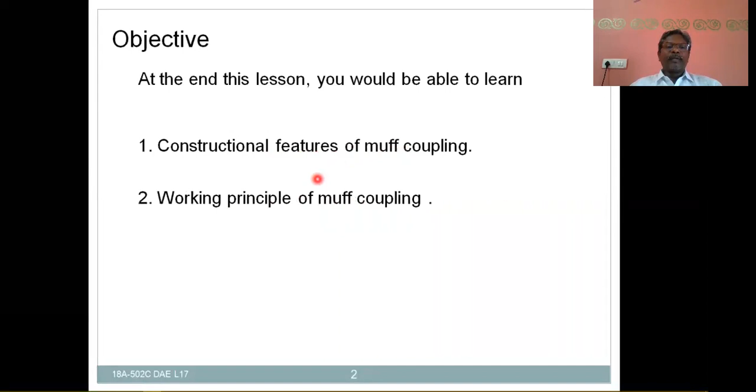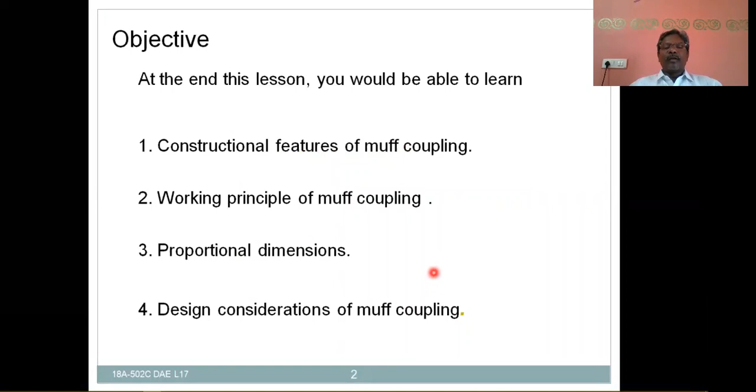So, muff coupling or sleeve coupling in this lesson. The objectives of this lesson are: at the end of this lesson, you will be able to learn the constructional features of muff coupling or sleeve coupling, the working principle of muff coupling, the proportional dimensions of muff coupling, and the design considerations of muff coupling. So, let us see one by one in this lesson. Muff coupling, also called sleeve coupling.

And this sleeve is inserted over the shaft, and another shaft is brought into the sleeve, and there should be half of the keyway in the sleeve or muff, and half of the keyway in the shaft, on both the shafts. And then after inserting this cast iron sleeve over the shaft, we insert the key into the keyway of the shaft as well as the sleeve. The key is generally made out of mild steel, that is, low carbon steel. In most cases, the shafts as well as the keys are made out of the same material, whereas the muff, that is the sleeve, is made out of cast iron. Drive this key into the keyway of the shaft as well as the muff.

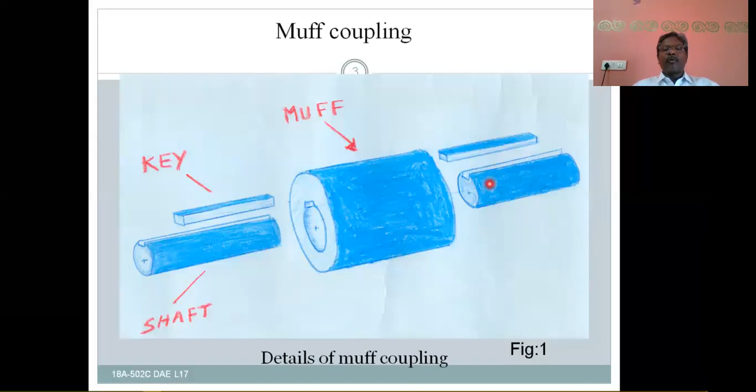Let D be the diameter of the shaft. D will be the diameter of the shaft, and the inside diameter of the muff or sleeve is also equal to the diameter of the shaft. So the inside diameter of the muff or sleeve is nothing but the diameter of the shaft, and the outside diameter of the muff or sleeve is 2 times the shaft diameter.

2 times the shaft diameter, whereas the length of the sleeve is 3 times the shaft diameter, right? So next is key proportions. Key proportions are as per the previous discussion, the standard proportions.

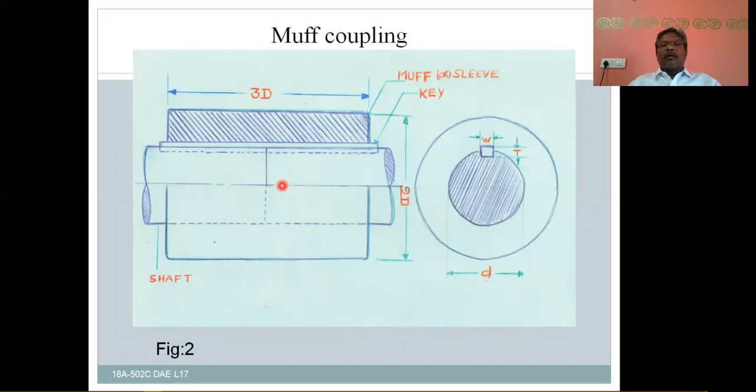Width of the key is 1 by 4th of the diameter of the shaft, and thickness of the key may be 1 by 6th of the diameter of the shaft. And next is the length of the key, generally equal to the length of the muff. And length of the key in each shaft may be half of the length of the muff, right? This is all about the assembly and the standard dimensions as per the proportions of the muff coupling or sleeve coupling.

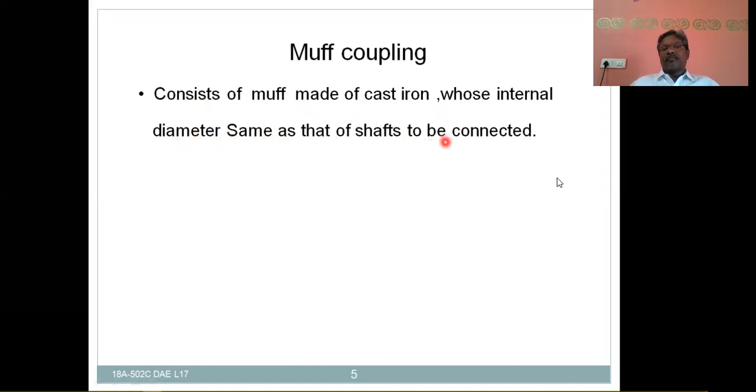Now let us see one by one. It consists of a muff made out of cast iron and whose internal diameter is same as that of the shafts to be connected. The muff internal diameter is same as the shaft diameter, and the muff is connected over the ends of the shafts by means of sunk key. The shafts are brought in line with each other, aligned and collinear, and over them the muff is connected to the ends by using sunk key.

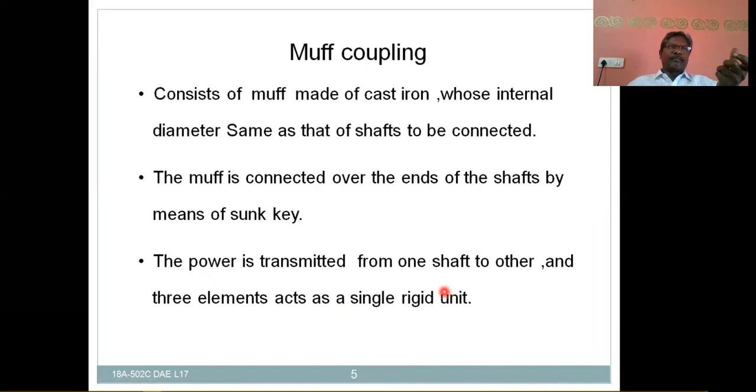And the power is transmitted from one shaft to the other shaft, and 3 elements act as a single unit. 3 elements, that means shaft, key, and muff. These 3 act as a single unit, right? So, and the proportions of cast iron sleeve or muff, let us see.

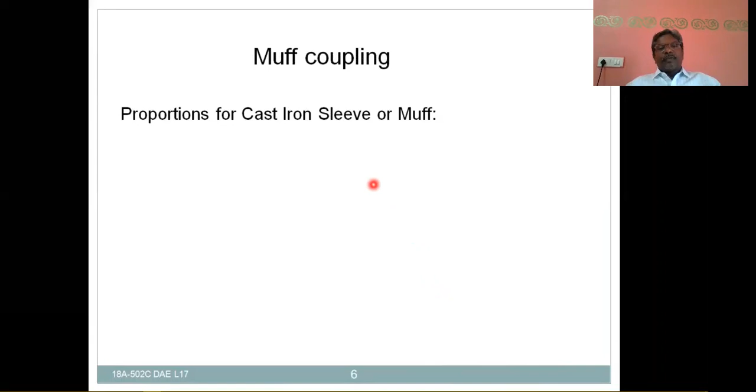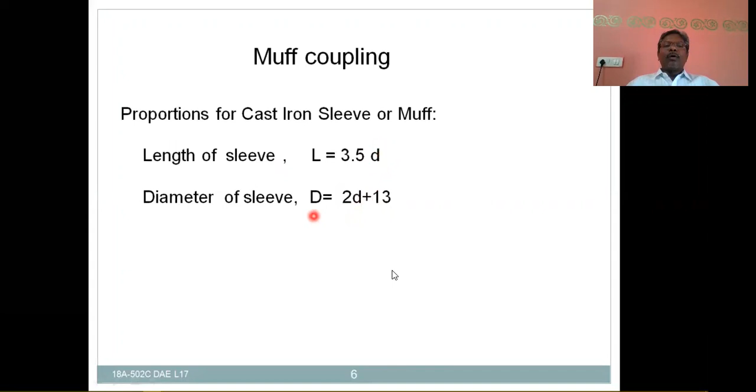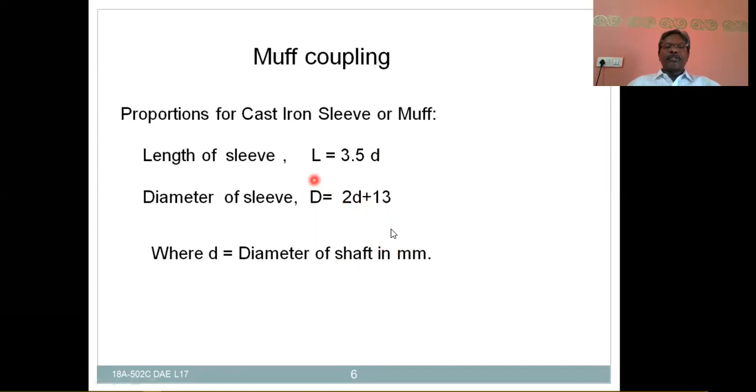So length of the sleeve, previously the figure itself is wrong, L is equal to 3.5D, length of the sleeve, and the diameter of the sleeve, also previously given in the figure itself is wrong, that is D is equal to 2d plus 13, where small d will be the diameter of the shaft. So outer diameter of the sleeve is 2d plus 13 and inner diameter of the sleeve is same as the diameter of the shaft. And where d is equal to diameter of the shaft in millimeters. Always it should be in millimeters. These are the proportions of cast iron muff or sleeve.

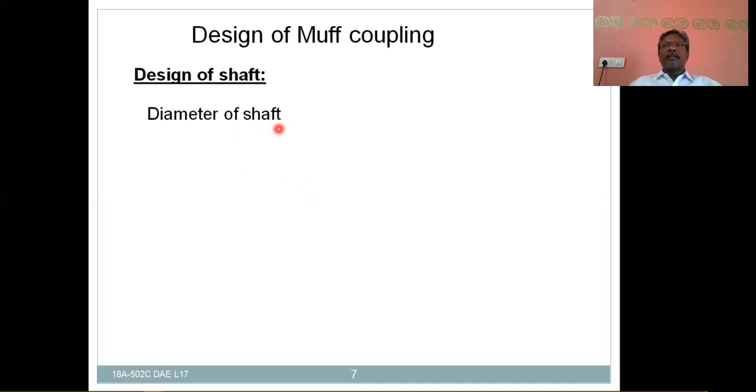Design of shafts. As per the design, diameter of the shaft can be calculated by using either the torque or from the power formula. That is, the torsional equation T by J equals tau by R. By using that, J is equal to pi by 32 d power 4. So R is equal to d by 2. After substitution, you are going to have torque acting on the shaft is equal to pi by 16 tau d cube, where d is the diameter of the shaft is equal to cubic root of 16 into T maximum by pi into tau. This is the equation that is useful for calculation of shaft diameter.

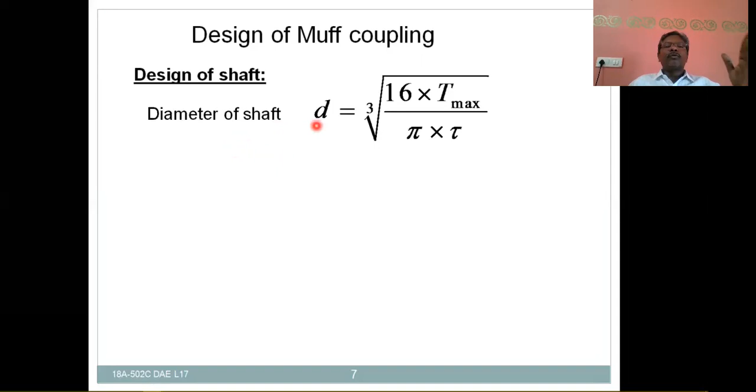And the torque can be calculated by using power formula and speed. With that, power transmitted by the shaft is equal to 2 pi NT by 60, where T will generally be the mean torque. Sometimes it may be the maximum torque also, if they are not given mean torque, right? So by power formula you can calculate a torque, and by torque formula, we are going to get diameter of the shaft. So T is the torque transmitted in Newton millimeters, and tau is the shear stress for shaft material in Newton per millimeter square.

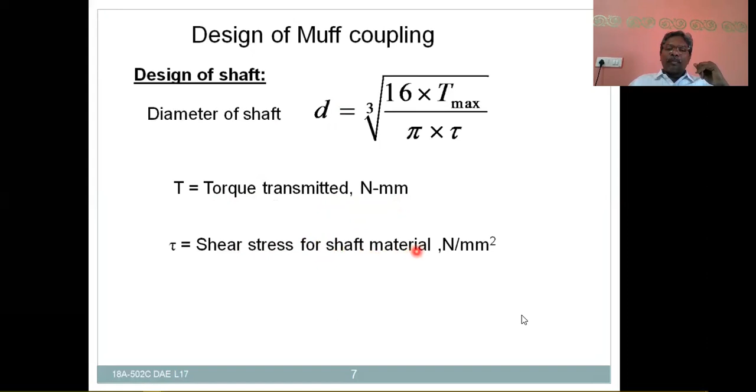And now the design of muff or sleeve. In the design of muff or sleeve, we are going to assume the muff as a hollow shaft.

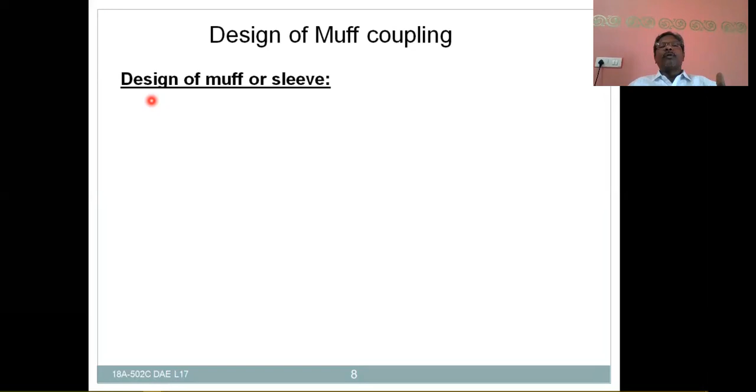Due to the assumption, it is just like a hollow shaft. The design of the hollow shaft is similar to the muff design. By the standard proportions, after calculating the shaft dimension, you have to decide the rest. That is, the length of the sleeve is 3.5d, the inner diameter of the muff is nothing but the shaft diameter, and the outer diameter of the muff is 2d plus 13 mm.

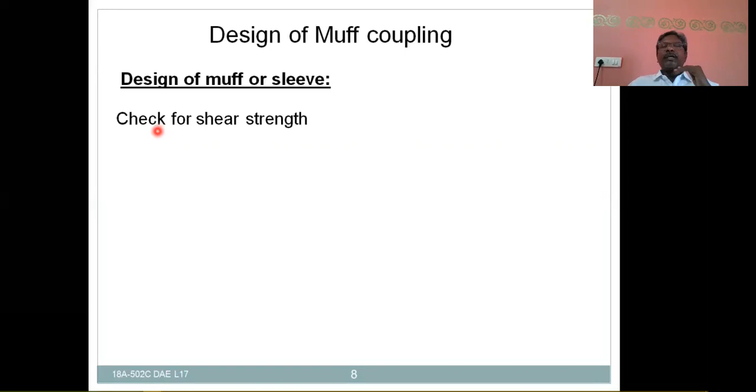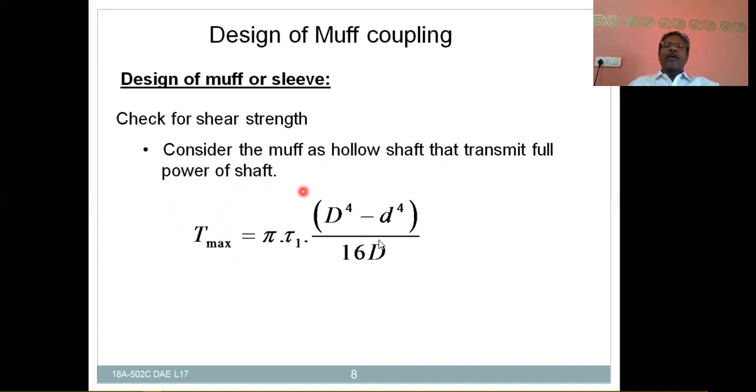So after calculating the dimensions, let us check for shear strength as a hollow shaft. Consider the muff as a hollow shaft that transmits the full power of the shaft. By using the torque formula for a hollow shaft, the same will be used here for checking the shear strength. That is, T maximum is equal to pi tau 1, where tau 1 is the shear stress induced in the cast iron muff,

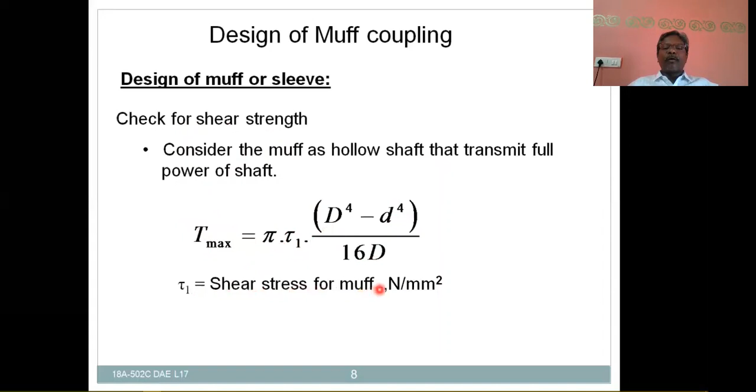into D power 4 minus small d power 4 by 16D. This is the formula. Based on this formula, you can check the induced shear stress of the muff. This induced shear stress must be less than the permissible value, that is, the allowable value. Tau 1 is the shear stress for the muff in Newton per millimeter square, maybe it is cast iron.

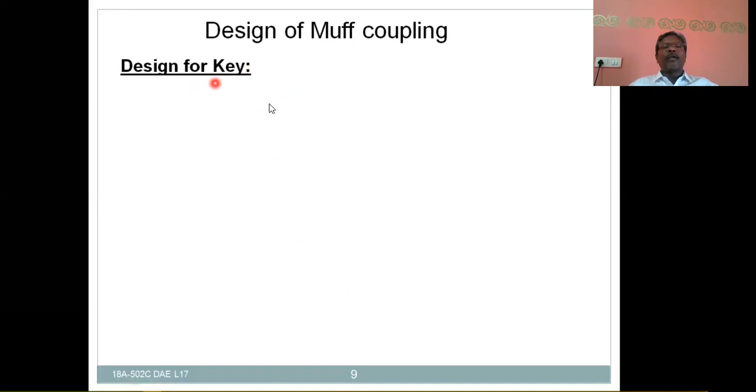Now the design of the key. In the case of key design also, first of all, calculate the standard proportions. Use the standard proportions for calculating the width as well as the thickness, and then calculate the length of the key by using crushing stress or shear stress, and check for any one of the crushing or shearing failure. So let us see the design for the key. Generally in the muff coupling, the length of the key must be equal to the length of the sleeve, that is L is equal to 3.5D.

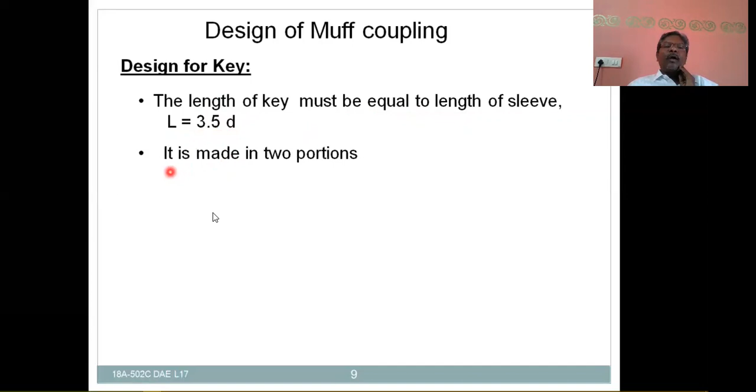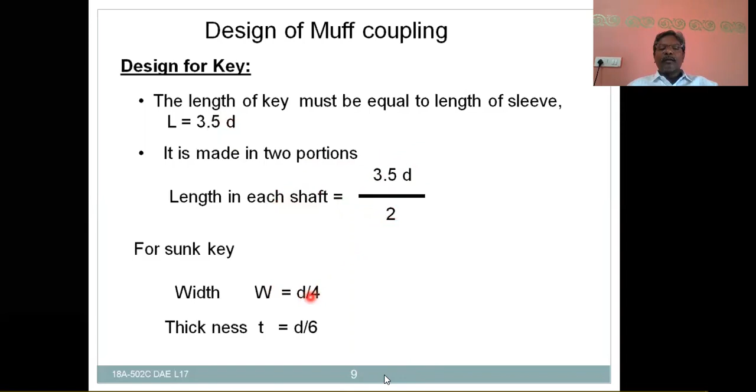So it is made in two portions, the length in each shaft, small l, is equal to 3.5D, which is capital L by 2. For a Sunk key, the width of the key is equal to D by 4 and the thickness of the key is equal to D by 6. So the length of the key in each shaft can be calculated by the standard proportions, and also the width and thickness. After calculating by the standard proportions, check for stresses in the key, that is, check for crushing failure and shear failure.

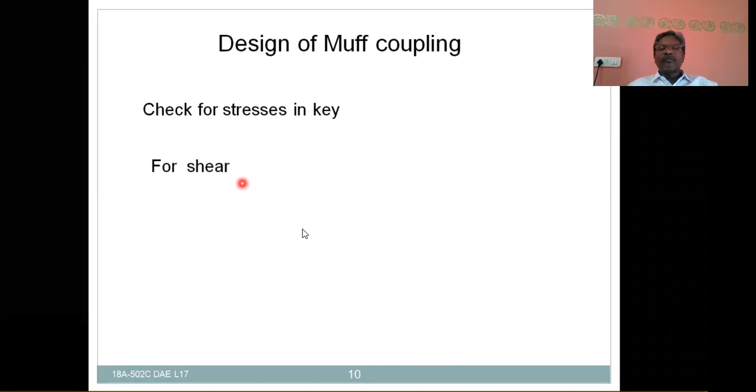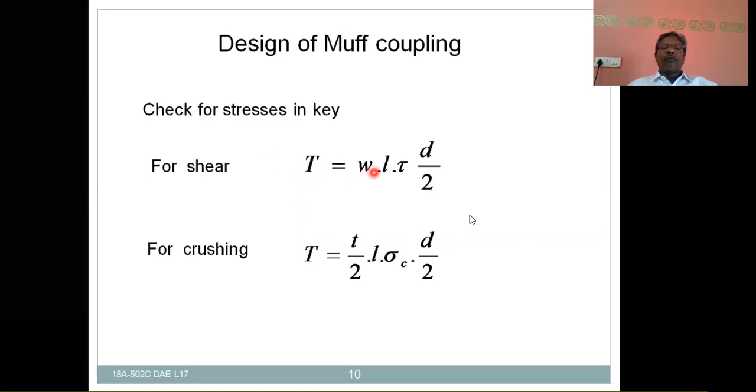For shear failure, T is equal to W L tau D by 2, where W L is the area of shear, tau is the shear stress of the key material, and D by 2 is the radius of the shaft. And also check for crushing stress, that is, T is equal to small t by 2 into L, which is the area of crushing, times sigma C, the crushing stress or compressive stress, times D by 2, the radius of the shaft. With these two equations, you can check for shear as well as crushing. If the induced shear stress and induced crushing stress are less than the permissible values, then the design of the key is safe. If either the shearing or crushing induced stress is more than the permissible value, then you have to modify the dimensions, that is, width as well as length, and check once again for the stresses, right?

So this is all about the design of muff coupling, right? In this case only three parts are there. Number one, shaft. By using the torque equation, pi by 16 tau d cube, you can calculate the diameter of the shaft. Then the muff, which is assumed as a hollow shaft; find the dimensions of the muff by using standard proportions, as the length is equal to 3.5D and the outer diameter of the muff is 2D plus 13, and the inner diameter of the muff is nothing but the shaft diameter. After calculating the proportions, check for shear stress induced in the muff.

If the shear stress induced in the muff is less than its permissible value, then the design is safe. If the induced stress is more than the permissible value, then you have to modify the dimensions, especially the outer as well as inner diameters of the muff, and then once again check for the stresses until the design becomes safe, right? After that, the design of the key is similar to the previous discussion of the keys. Here also, as per the standard proportions, you have to decide the width and key thickness, and the length of the key in each shaft is equal to half of the length of the sleeve. After calculating the proportions, check for the shear stress and the crushing stress. If the induced stresses are less than their permissible values, the design is safe, right?

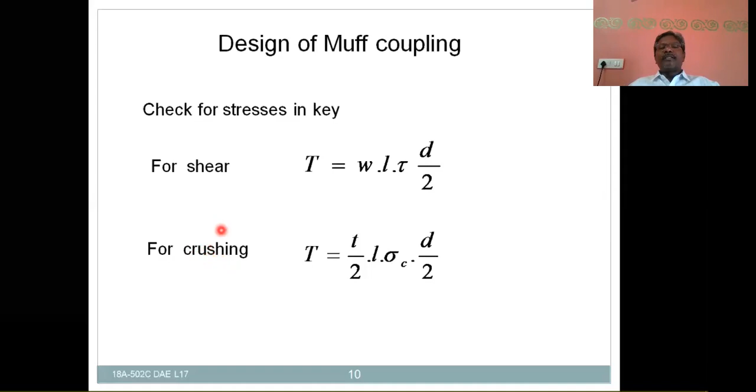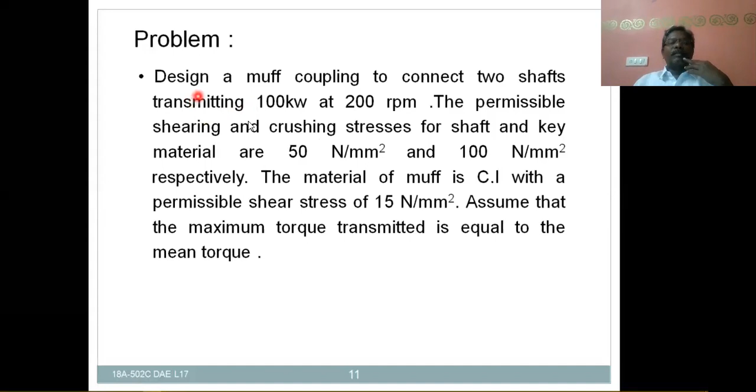Problem on muff coupling or sleeve coupling. Here is the problem. Design a muff coupling connecting two shafts transmitting 100 kilowatts at 200 RPM. The permissible shearing and crushing stresses for shaft and key material are 50 Newton per mm square and 100 Newton per mm square respectively. The material of muff is cast iron with a permissible shear stress of 15 Newtons per mm square. Assume that the maximum torque transmitted is equal to the mean torque. Let us solve this problem.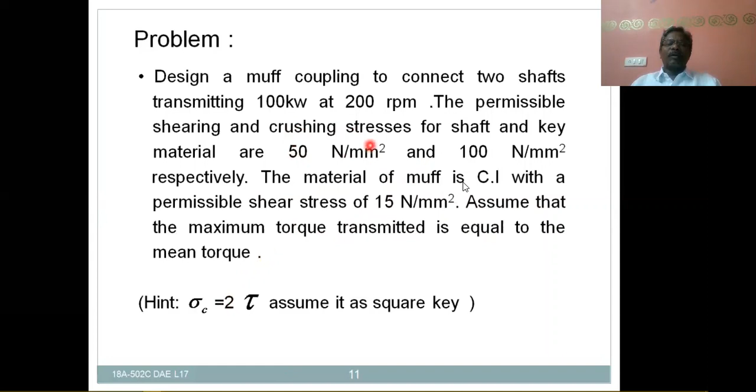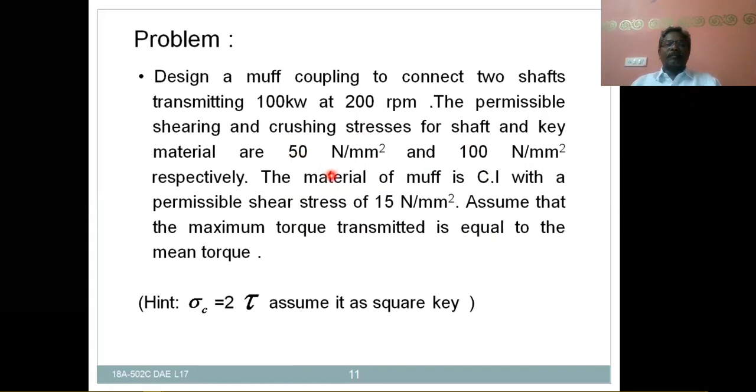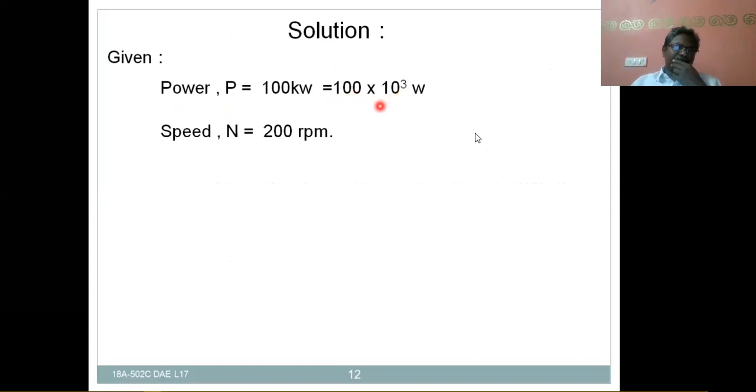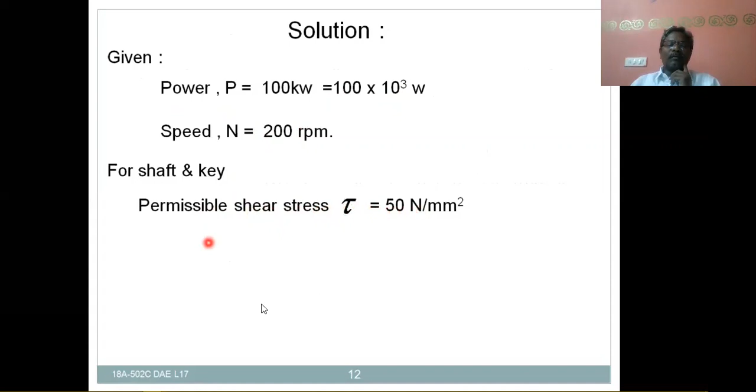So here one hint is, as this is the 50 Newtons per millimeter square of shear stress, and this is 100 Newtons per millimeter square crushing stress, and this is 2 times the shearing stress, that's why it is a square key. The power transmitted is 100 kilowatts, that is 100 into 10 to the power of 3 watts, and the speed is 200 RPM. For shaft and key, permissible shear stress tau is equal to 50 Newtons per millimeter square, and permissible crushing stress sigma c is equal to 100 Newtons per millimeter square. For muff, the permissible shear stress is 15 Newtons per mm square.

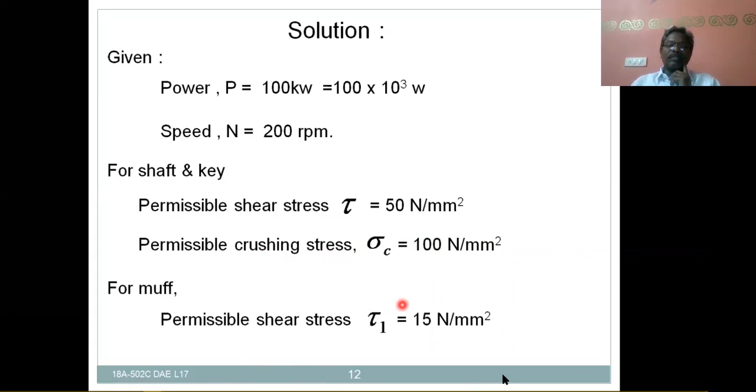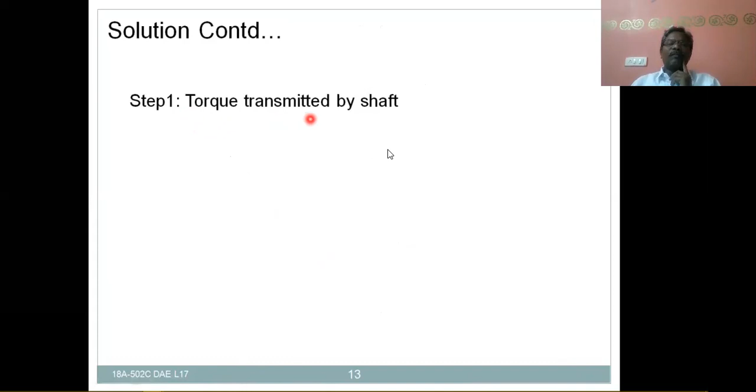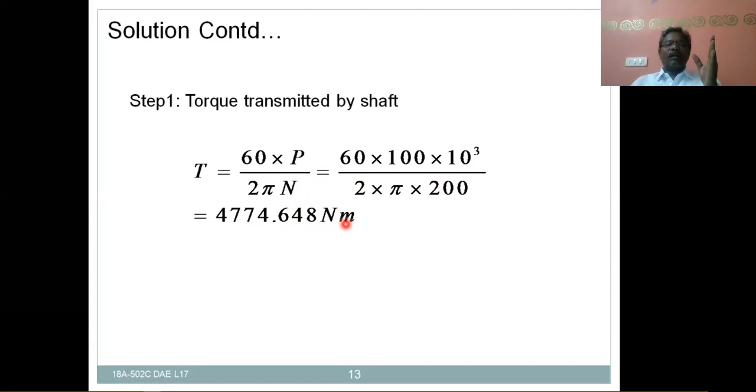So step 1, the design of shafts. In this, torque transmitted by the shaft is T equal to 60 P by 2 pi N, and here the power is 100 kilowatts, and N is equal to 200 RPM. After substitution of power value 100 into 10 to the power of 3 and substitution of speed in revolutions per minute, we got 4774.648 Newton meters of torque. And this is the mean torque actually. And as per the given data, mean torque itself is the maximum torque.

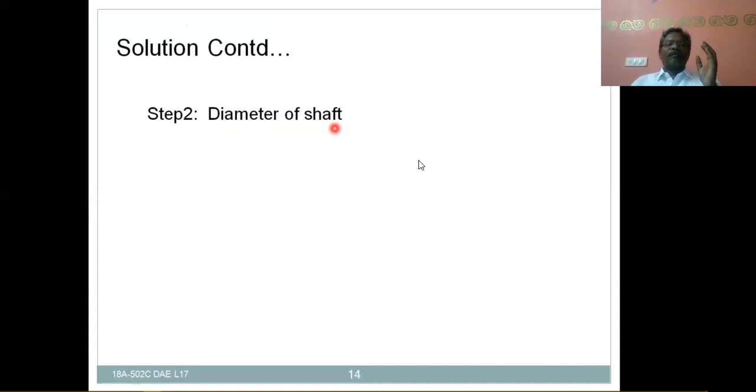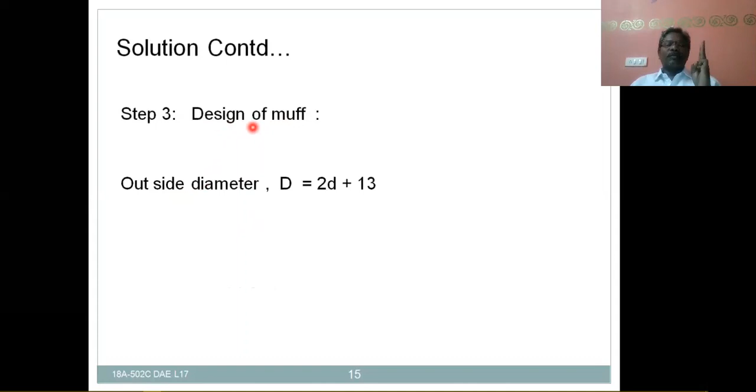So now the design of muff or sleeve, you can say. Third step, in this design of muff or sleeve, first of all, let us take the standard proportional dimensions for the muff. That is, the length of the muff L should be 3.5 times the shaft diameter, and the outside diameter of the muff D is equal to 2 times the diameter plus 13, and the inside diameter of the muff is nothing but the shaft diameter. So outside diameter D is equal to 2d plus 13 mm.

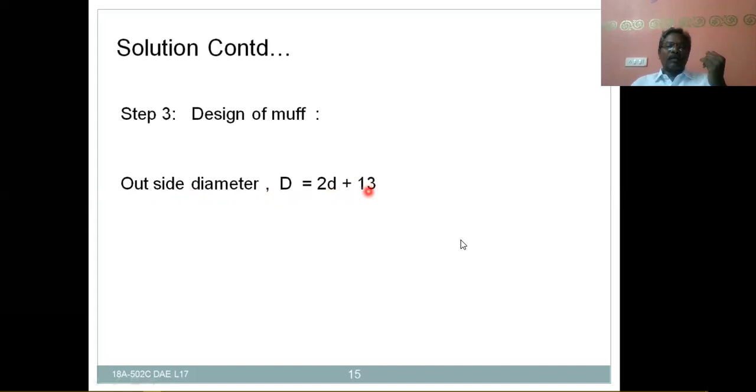After substitution of the diameter of the shaft, you get 171 millimeters of outside diameter, and the inside diameter itself is the shaft diameter. That's why small d is equal to 79 mm. Next is the length of the muff. L is equal to 3.5 d, where d is equal to 79. After substitution, we get 276.5 mm.

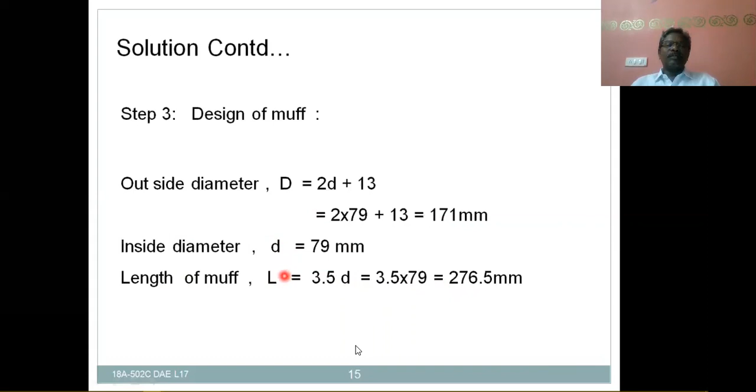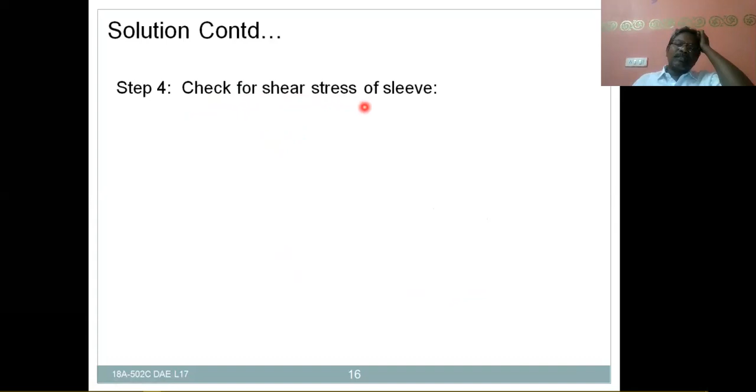After calculation of the outside diameter, inside diameter, as well as the length of the muff, you have to verify whether the shear stress induced is less than the permissible value or not. So check for shear stress of sleeve or muff. Here in this case, tau 1 is equal to 16 D T by pi into D to the power 4 minus small d to the power 4, and D, capital T and small d are all known to us.

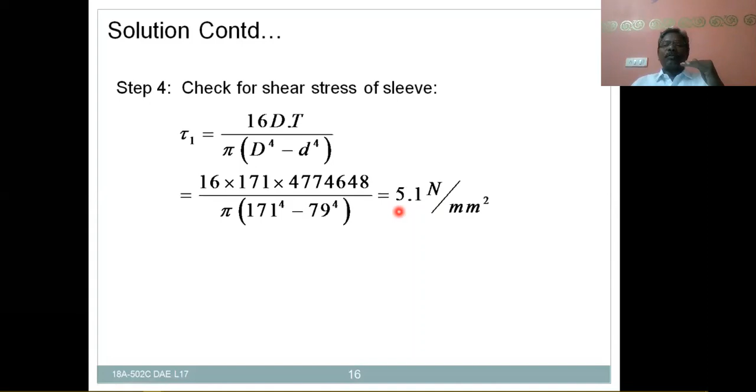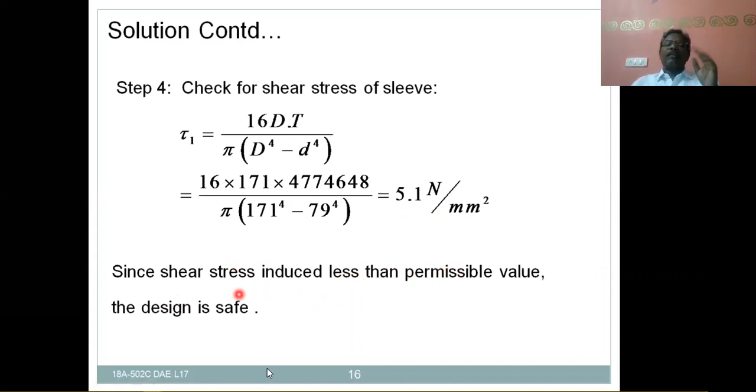Thereby the shear stress induced in the muff or sleeve, which is cast iron, after substitution of all these values, we got 5.1 Newton per millimeter square, which is less than its permissible value. That means this induced shear stress, 5.1 Newton per mm square, is less than the permissible value, that is 15 Newton per mm square. So since the shear stress induced is less than the permissible value, the design of the sleeve is safe.

Since sigma c, that is the crushing stress in the key, is equal to 2 times the shear stress in the key in case of design of key, as per the given values of shearing stress and crushing stress, we can simply say that it is a square key, which is equally strong in width as well as thickness, equal dimensions, and also equally strong in shear and crushing. So in such case, W is equal to T, whereas the length is different.

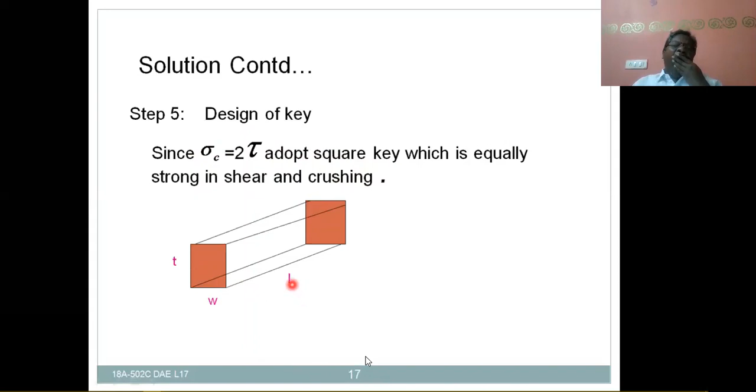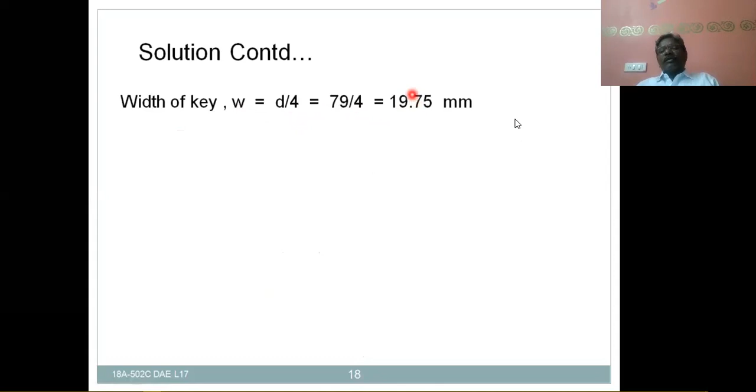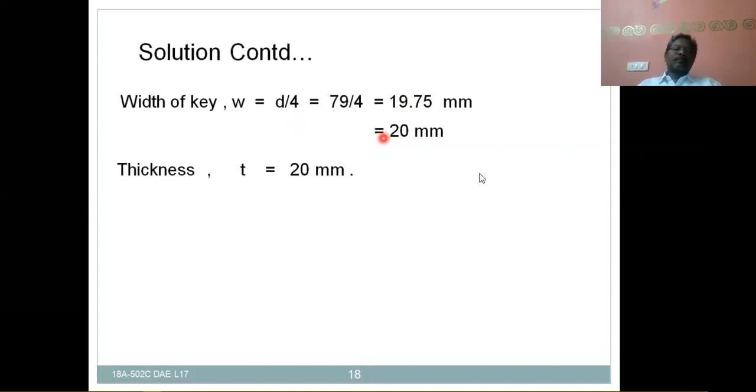For this key, let us take standard proportions as per the BIS. The width of the key is nothing but the thickness of the key for a square key. So W, the width of the key, is 1/4 of the shaft diameter, that is 19.75. Let it be 20 mm, which is also equal to the thickness of the key. So T is also 20 mm. The total length of the key is equal to the length of the hub, whereas in each shaft it is half of the key length. That's why the length of the key in each shaft, small l, is equal to 3.5 d by 2, that is the length of the muff capital L by 2. So you get this as 139.

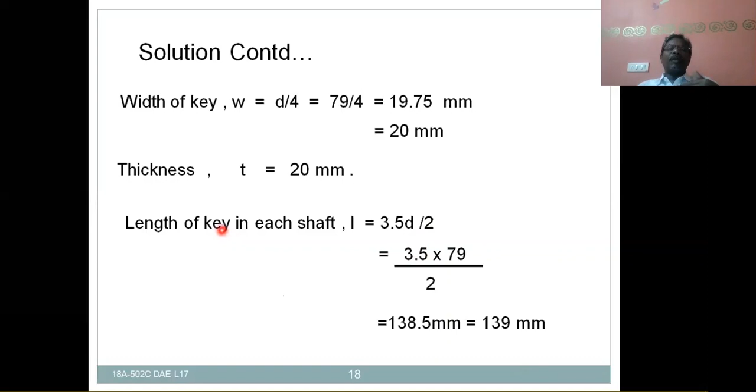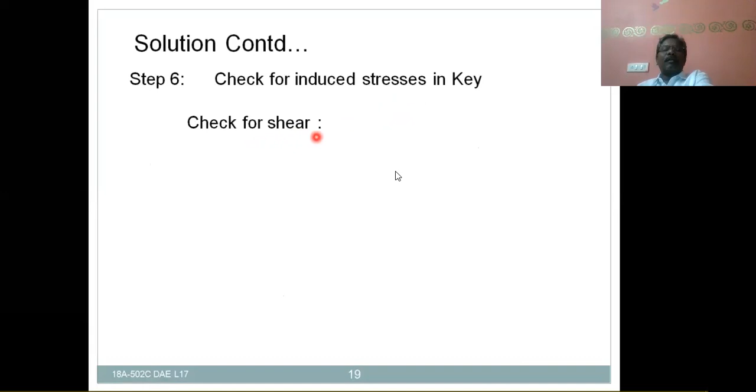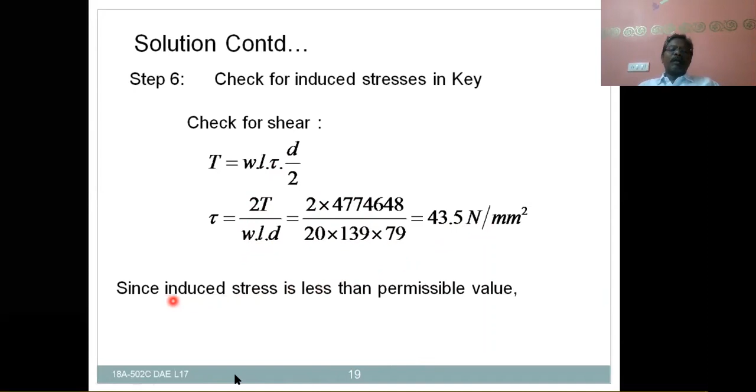So here we have the width of the key, the thickness of the key, and also the length of the key. That means all the proportions are there. Thereby you have to check for induced shear stress in the key, that is for shearing. Check for shearing: T is equal to W L tau d by 2. After substitution, tau should be calculated, and tau is equal to 2T by W L D. After substitution of all the values, you get 43.5 Newton per millimeter square. This is the induced shear stress in the key, which is less than the permissible value of 50 Newton per mm square. So the induced shear stress is less than its permissible value, whereby the design is safe.

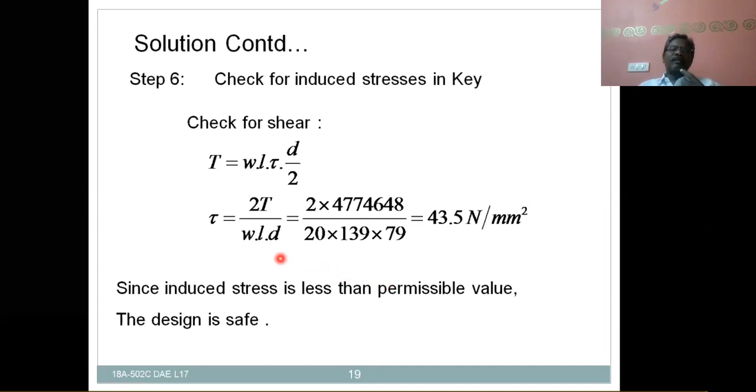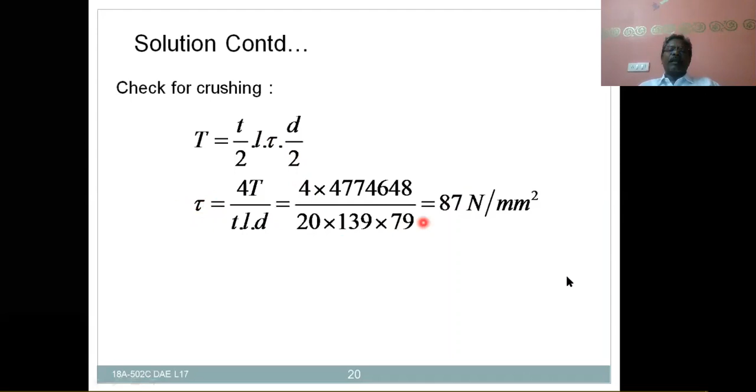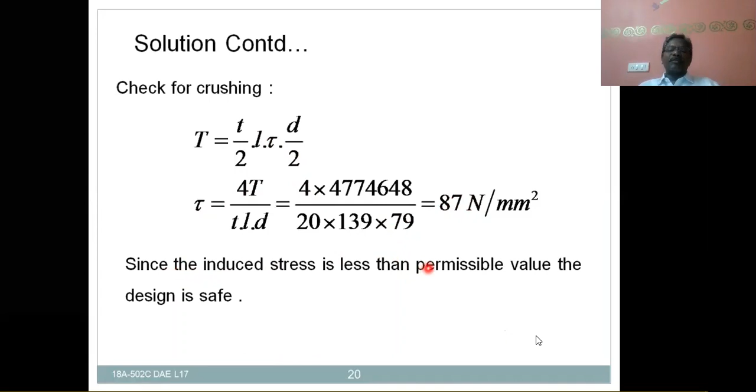So with this we concluded the shaft diameters, we have completed the design of the muff, and in this case the key also. Thereby for checking for crushing, T is equal to T by 2 into L into sigma c into D by 2. After calculation it is only 87 Newton per mm square. Sorry, it is not tau, it is sigma c. The crushing stress in the key should be less than 100 Newton per mm square. That's why the design is safe. Since the induced stress is less than the permissible value, the design is safe. So with this we concluded this topic.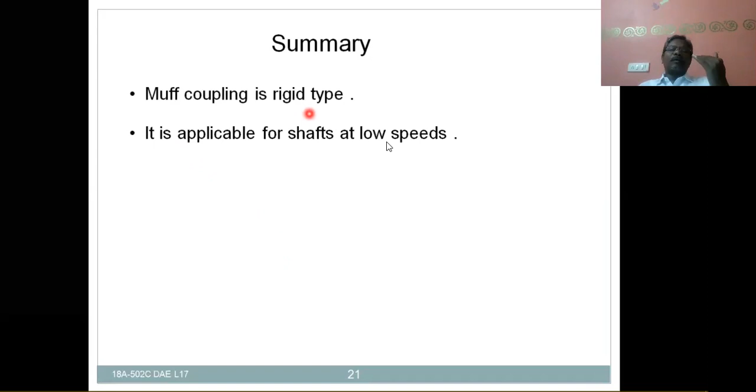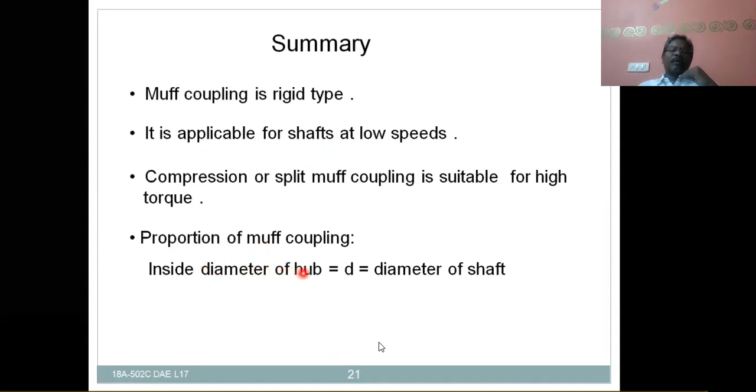In this chapter we have completed the construction details and working of the muff coupling, and also the design of the muff coupling. We also solved one problem, and let us have a small summary. The muff coupling is a rigid type coupling, and it is applicable for shafts at low speeds. The compression or split muff coupling is suitable for high torque. As for the proportions of the muff coupling, the inside diameter of the hub or muff is equal to the diameter of the shaft, and the outside diameter of the muff or sleeve is D equal to 2d plus 13.

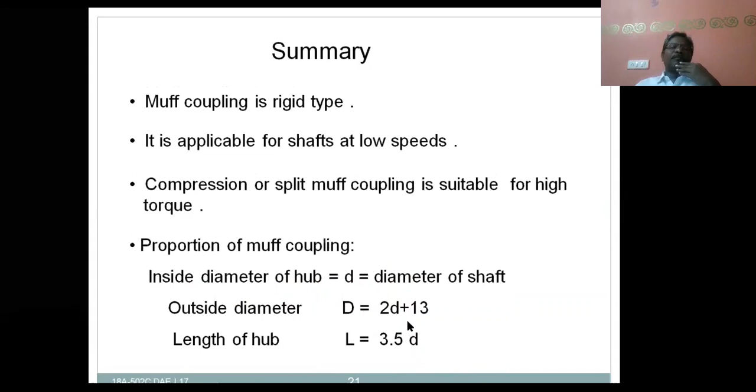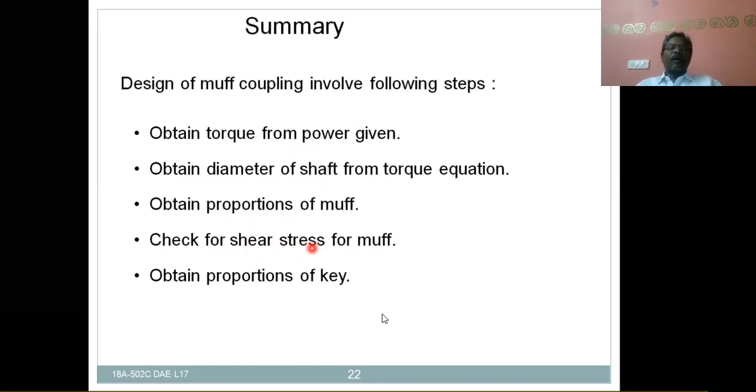And the length of the hub is equal to capital L is equal to 3.5 D. And the design of muff coupling involves the following steps. One is obtain torque from power given, obtain diameter of shaft from torque equation, obtain proportions of muff, check for shear stress for muff, and obtain proportions for key, and check for shearing and crushing stress of key. So with this we concluded the design steps.

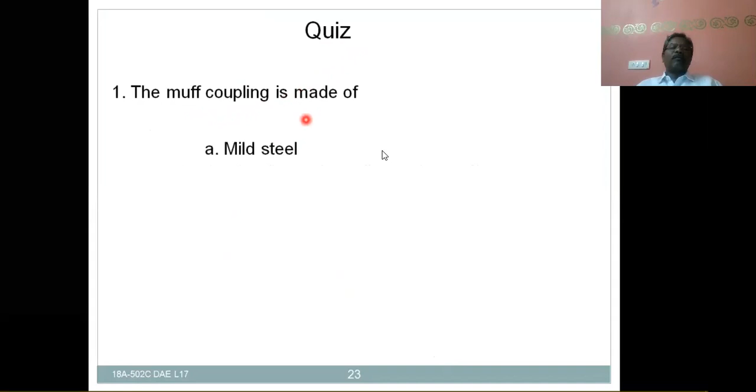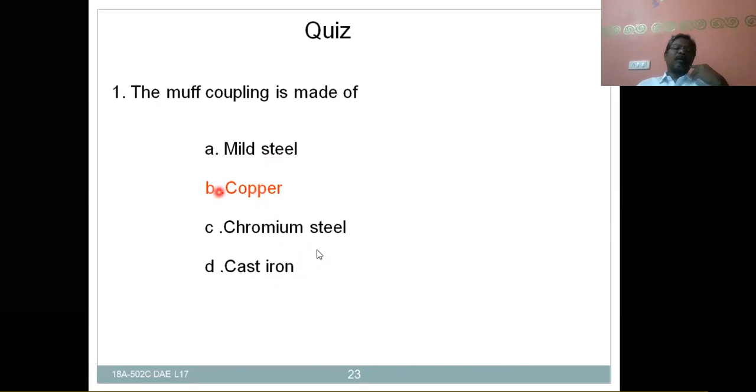So now a small quiz. Here the muff coupling is made of mild steel, copper, chromium steel, cast iron. So muff coupling is made of which material? Mild steel, copper, chromium steel, cast iron. So cast iron is the right answer. This is a wrong answer. Actually, cast iron should be

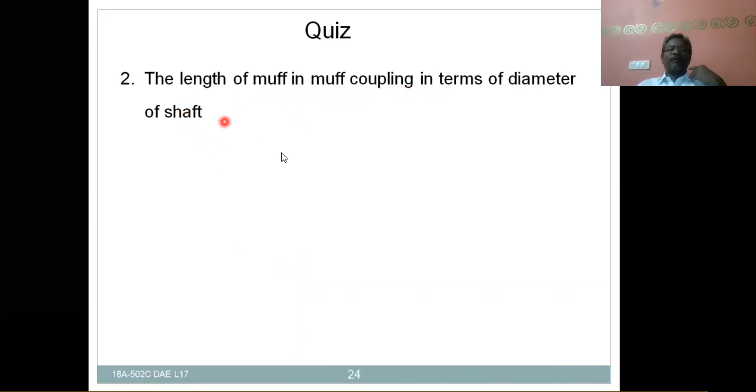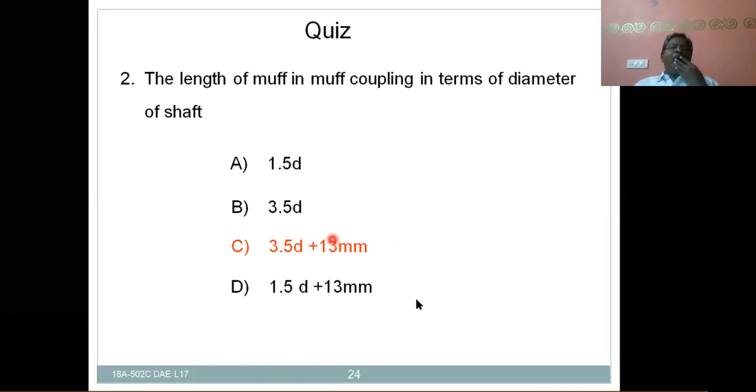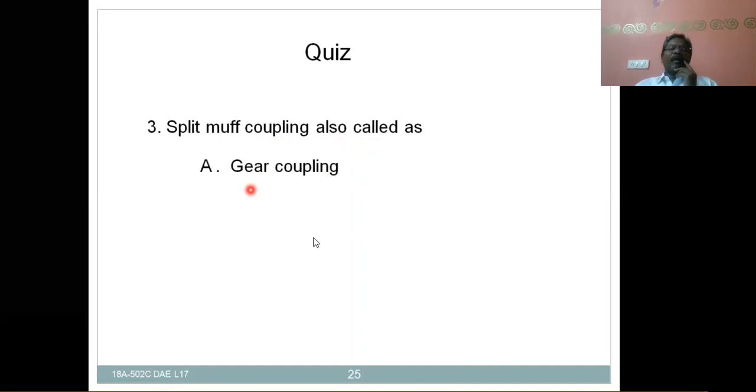Split muff coupling is also called as gear coupling, clamp coupling, compression coupling. Both B and C should be the right answer. Okay, this is the right answer. D is the right answer.

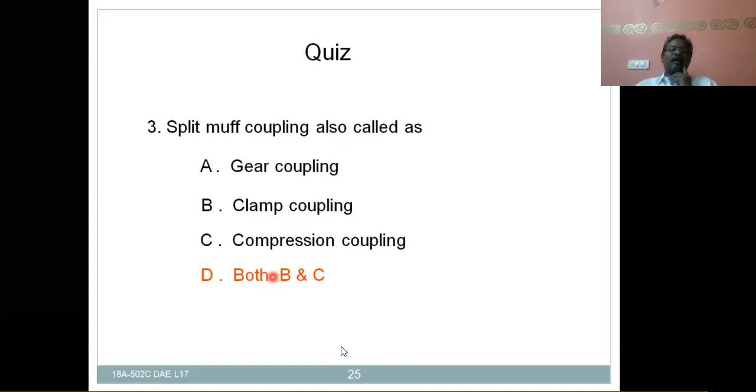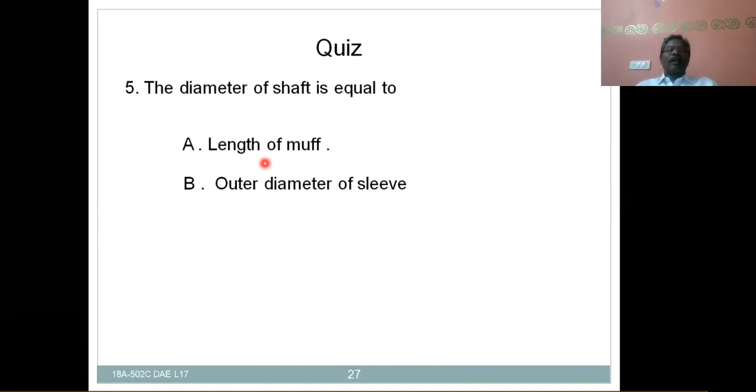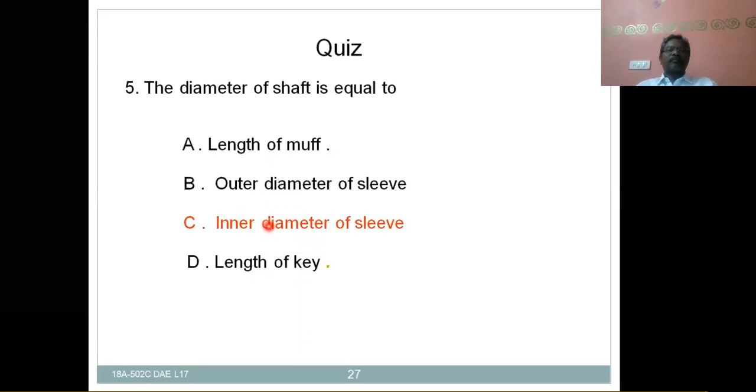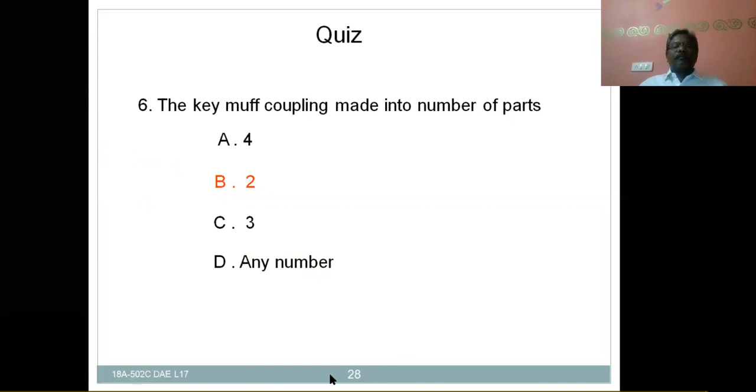The diameter of shaft is equal to length of muff, outer diameter of sleeve, inner diameter of sleeve, and length of key. It should be the inner diameter of the sleeve. The key of muff coupling is made into a number of parts. A is equal to 4, B is equal to 2, C is equal to 3, and any number. It should be B. Okay, right answer. So this is the right answer.

So maximum torque is 25% more than average torque, means from the power formula you are going to get the mean torque. By using the mean torque, the maximum torque transmitted should be equal to 1.25 times the average torque or mean torque.